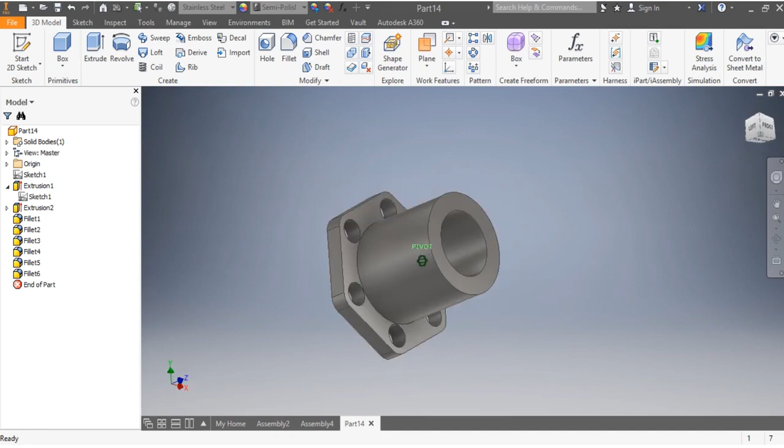Without wasting any time, we go to new, then metric, standard millimeter, and then create. So here, what we're going to do first is go for the hexagon.

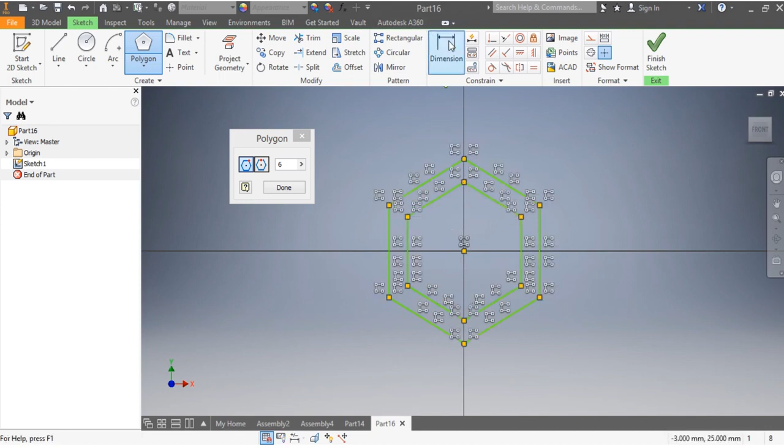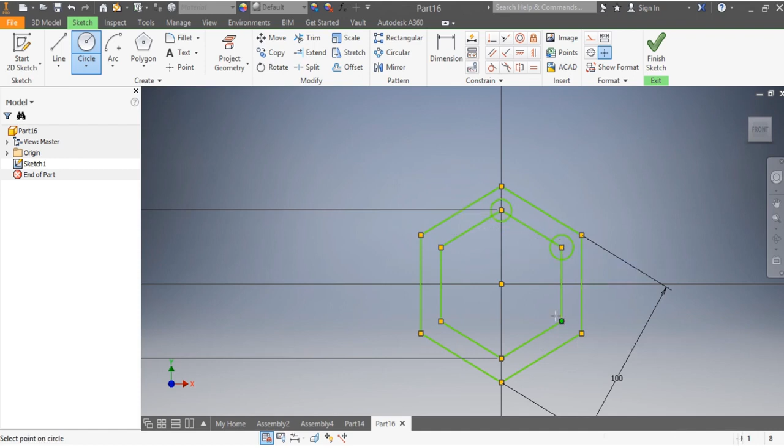Once that is done, we're going to go for the holes. So the first one, and then this again, the third, the fourth, the fifth, and the sixth. And then we want this dimension, that one, to be 16 millimeters.

So that needs to be 16 millimeters. And I want this one to be 16 as well, and this to be 16, that one to be 16, this one to be 16. So that needs to be equal to that one.

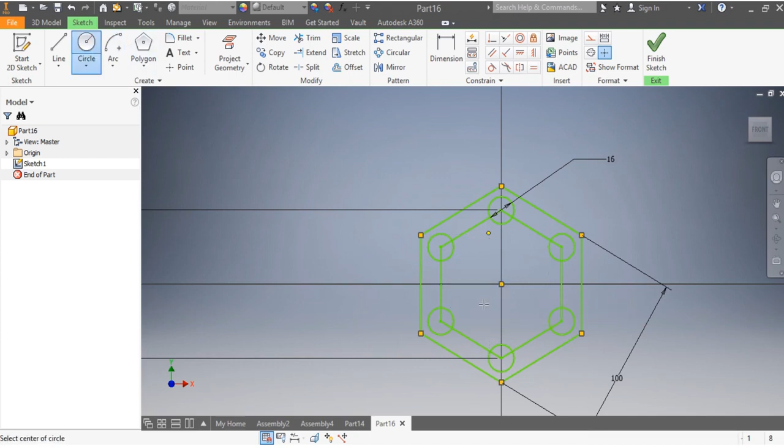Once that is done, I'm going to go for my circle. My first and my third, that one, they need to be 70 millimeters. So that needs to be 70 millimeters, and this one needs to be 45 millimeters.

Once that is done, what I'm going to do next is delete this. So I want to delete that one, delete this one, delete that one, delete that, delete that, delete that.

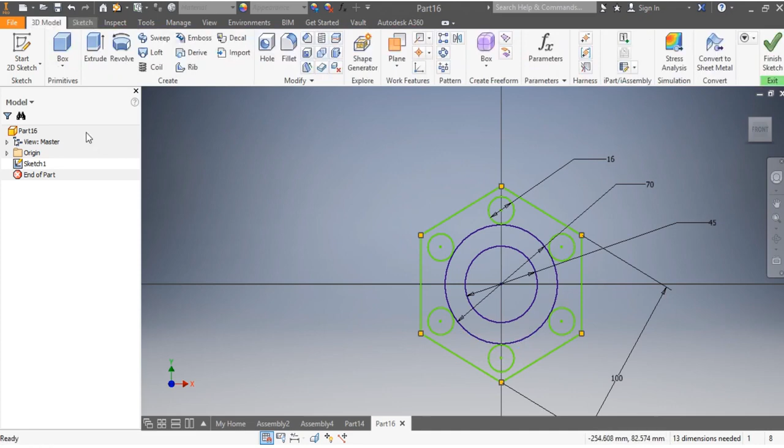Here I go to 3D model, then extrude. So now here I want this to be extruded by 12 millimeters. So that needs to go by 12 millimeters.

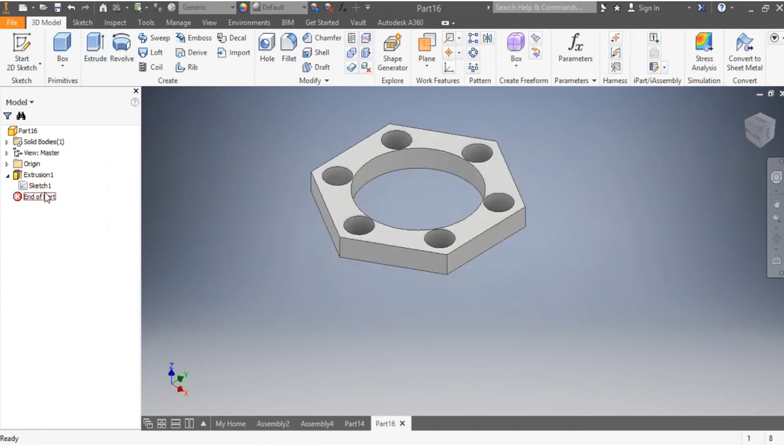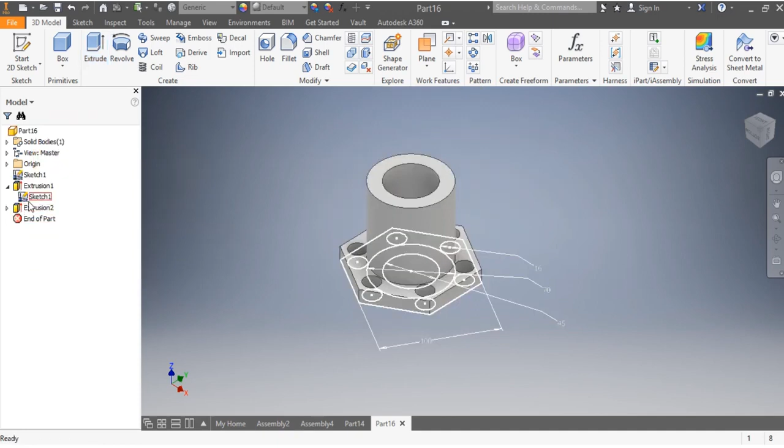That's done. Then I come here, I say visibility removed. So that is done.

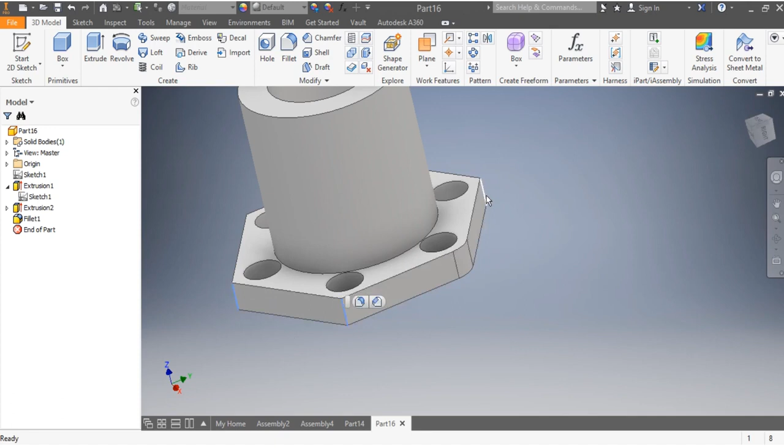And then here I want to have this corner smoothened. Let's say it needs to have a radius of 10 millimeters. That's one, this and that, and this one too, with 10 millimeter fillets. So there we go.

You can see that was simple and quick. So the next thing that you have to do is choose the material.

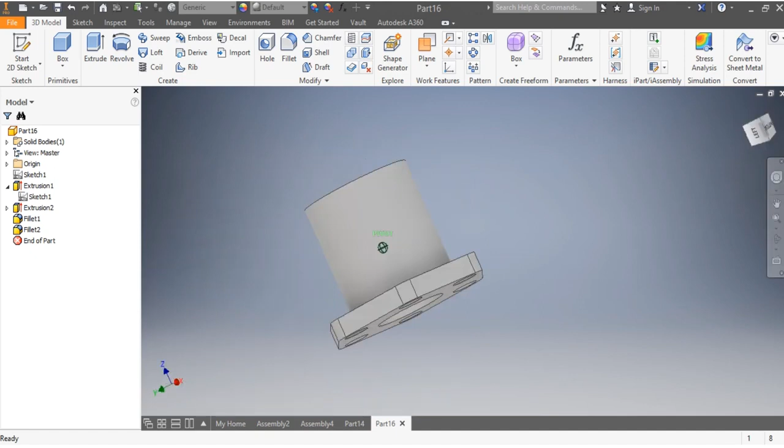This one needs to have a material, let's say stainless steel. Let's just put stainless steel, because stainless steel is beautiful. There you go. This is how it looks like. You can see it's simple and beautiful.